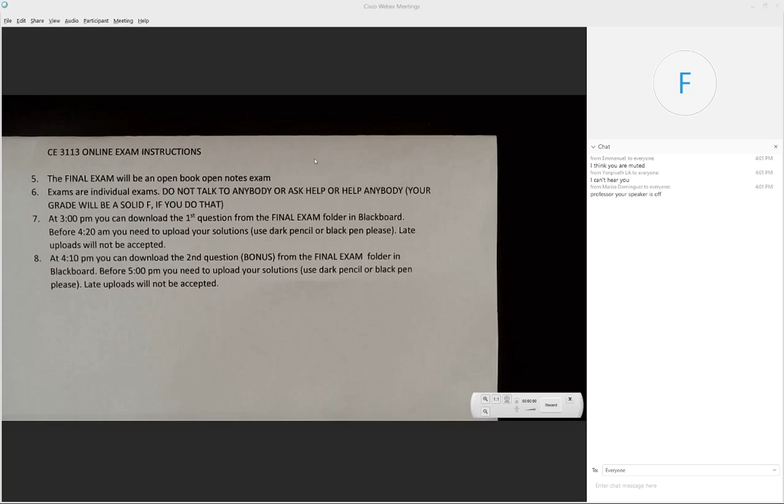I want to repeat what I was saying. The exam is next Monday. Make sure that you are on time.

I'm going to repeat that we had the technology to watch it, so make sure that you do solve the exam by yourself. And I do need to see your work.

At 3 o'clock, you're going to be able to download the exam. I'm going to put the exam on the screen for 10 or 15 minutes, and then I'm going to remove it. You have until 4:20 to finish your exam, and you need to upload it.

For some of you that take pictures, it's going to take forever because the file is going to be huge. You have to do a PDF, a clean PDF, and send it to me. Please don't email the exam to me. Just upload it. There is an overlap at 4:10.

You're going to be able to download the bonus. Officially, the exam is supposed to finish at 4:50, but I'm going to give you 10 minutes, so by 5 you need to upload the second question. Again, do not send it to me, just upload it. Any questions about this?

Dr. Diaz is in charge of scholarships, but he did not send me the whole information, so this is what I got. I'm going to ask Dr. Diaz to resend it to me, and I will put it in a folder called scholarship.

I do know that you have to have letters of recommendation. Sorry, two. One of them must be from a faculty advisor. Make sure that you read what is required, because Dr. Diaz will not accept any application that is late.

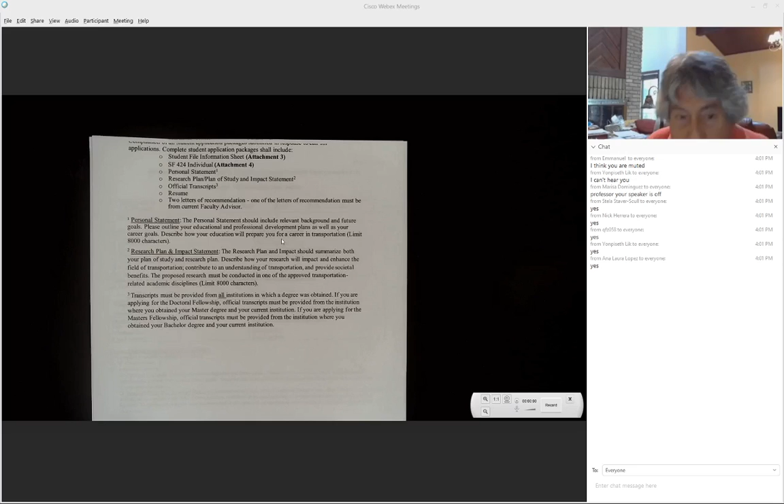But this is a great opportunity, very easy. Not too many people apply. Last year we only had 2 people applying, so everybody that applied got the money. Don't forget, it's called the Eisenhower Scholarship, and I will upload that as soon as I get it from Dr. D.

So if we ask you, it is like two in one. You talking about the letter? Well, we'll talk about that later. You can find me.

A lot of people have questions about the fixed end moment table. In the old time, we only had the left side. So in the old time, the only thing that we had was this side of the table. Now we have both sides of the table.

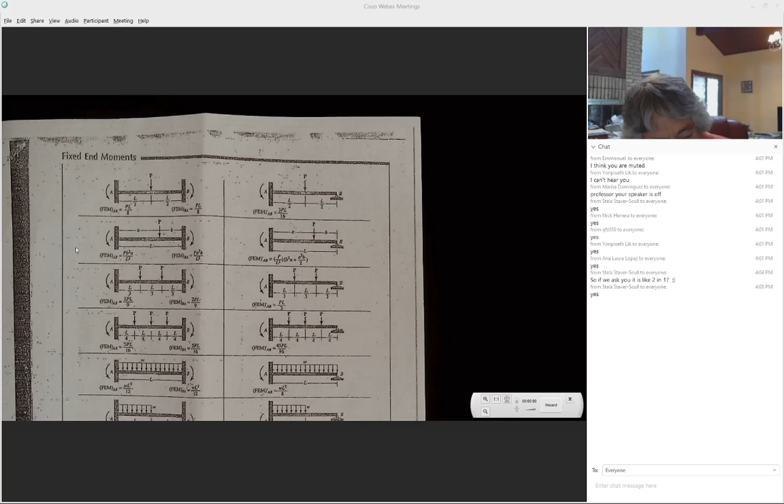Some of the old exams are solved by using this table, and it becomes very confusing whenever we use 4EI and 3EI. The right hand side takes into consideration that sometimes at the end of a member there is a roller or a pin.

That means the moment has to be zero. If there is a pin or a roller, there is no way that you're going to have a moment. If there is a moment, something is wrong.

But I mentioned before that if you use this left-hand side fix and fix, you can obtain this right-hand side with fix to the left and roller to the right, or fix to the right and roller to the left.

All that you have to do to create this fix at the left and roller on the right-hand side is remove this moment. The way we remove the moment, we put an equal and opposite, and we send 50% across, and the two moments now become 3PL over 16.

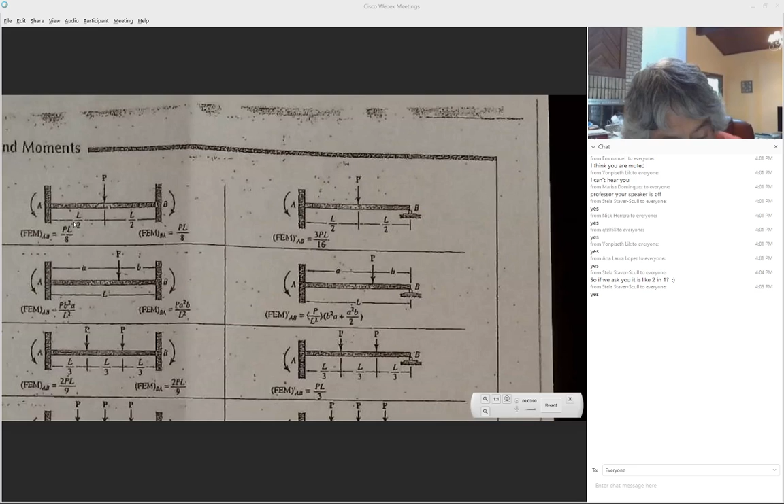If you do the opposite, if you leave this fixed and you put a roller in there, all that you're going to do is put an equal and opposite and send 50% across. Also it's going to be 3PL over 16, but in the other direction.

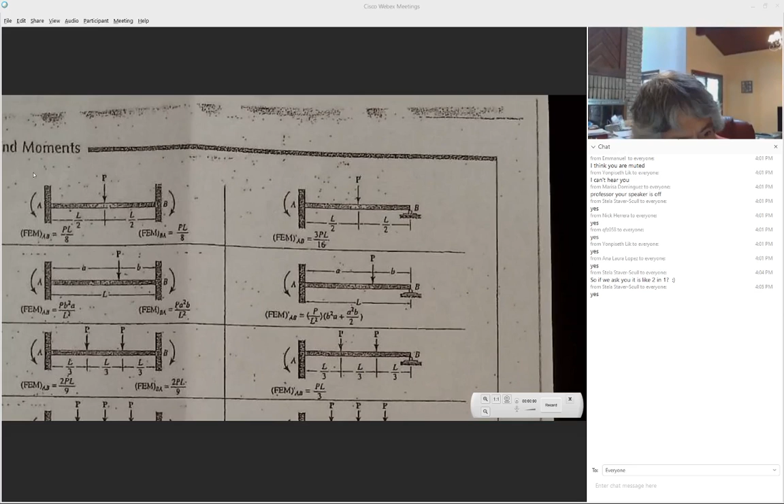So all of these tables on the right-hand side were built by using the left-hand side. Even if you have 3EI over L, you can start with this one, but it's better to use this one so you won't get confused. Some people, nothing wrong, if you have 3EI over L, you can either use this or use this one. But don't forget that in this case, the moment has to be zero.

Another thing, I'm going to go through a whole bunch of examples right now, and the only thing that I want you to know is this.

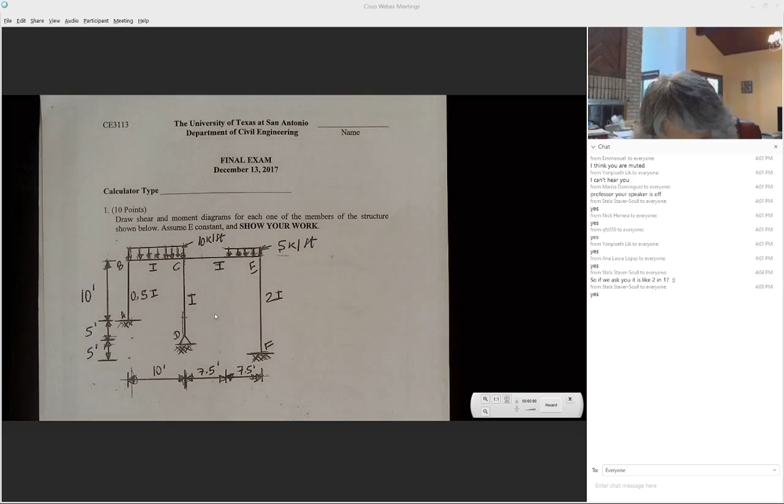So now we have to decide if we're going to use 4EI or 3EI, and it has nothing to do with the loading. It has to do with the ability of the member to resist a moment or to have moment equal to zero.

So now I want to ask you, and I'm going to write it in there. A, B, and forget about 0.5 I, forget about the I. This in here is going to be 4EI or 3EI from A to B. Anybody? 4 or 3? Definitely 4. So I'm going to put a 4 in there, EI.

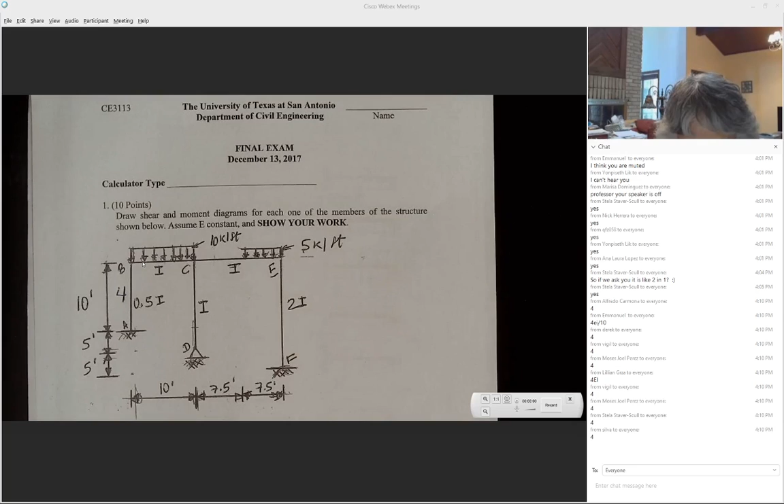4 or 3? Are you sure? Great, 4. This is going to be 4EI. I'm not putting the whole thing. CE, 4 or 3 EI? 4. Great.

So in here, this member, 4 or 3 EI? 3. Great. This member in here, 4 or 3? 4. Wonderful.

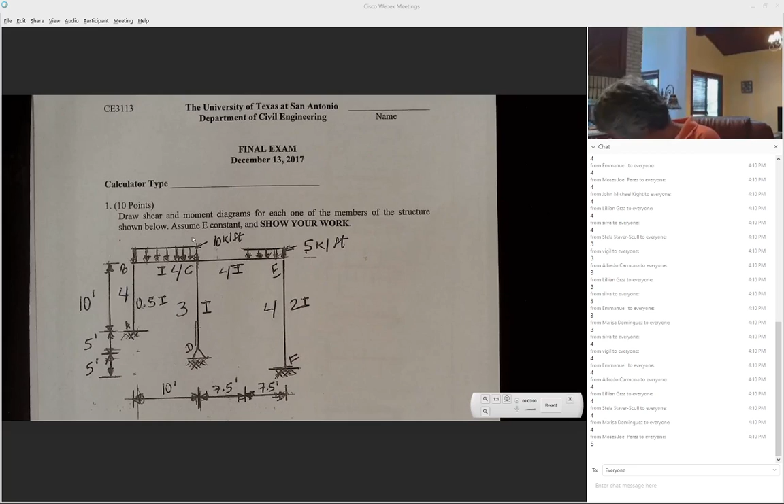So the moment BC is going to be WL squared over 12. The moment CB is going to be WL squared over 12. So we're going to use this: WL squared over 12 and WL squared over 8.

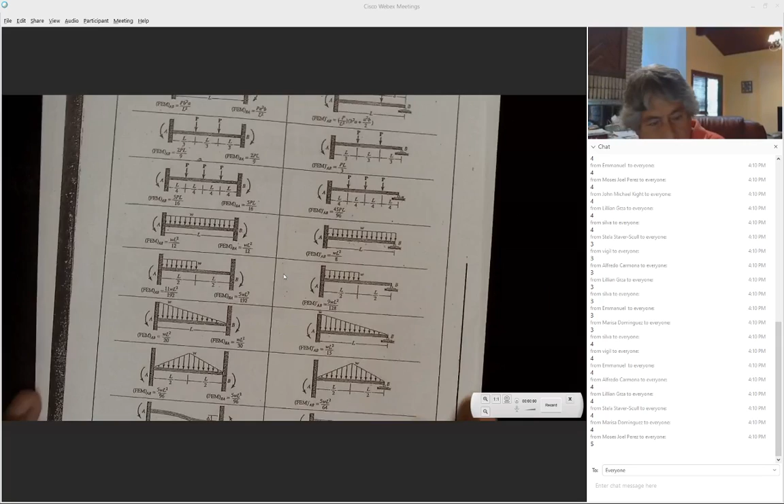This one, you're going to have a fixed moment here, fixed moment. Look, to do this moment in here, they put this as plus 11WL squared over 192. They put a 5, they put a minus 5WL squared over 192, and then they send 50% across and combine this moment with this divided by 2, and gave you this one.

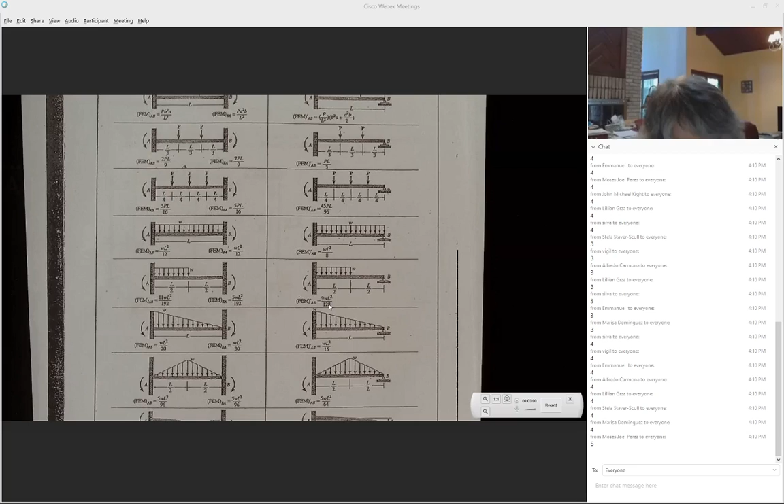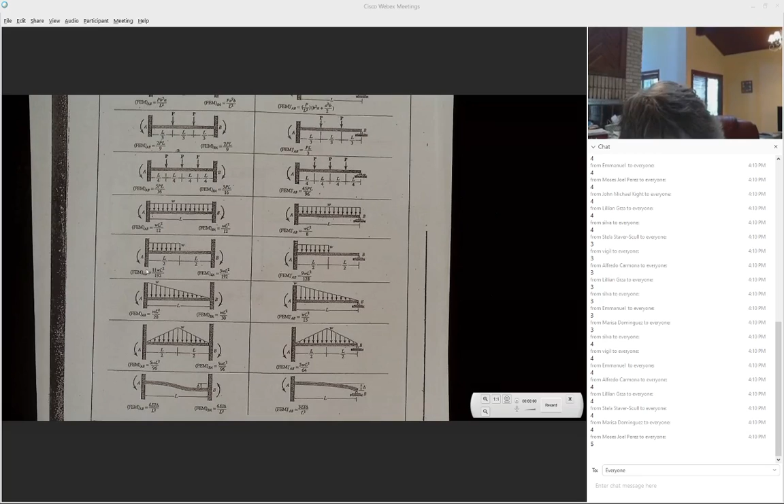This case is not in the table. So the only thing that you need to do, you put this load in here and move this moment here and that moment to there.

This case is not in the table, but we know that the moment in here is going to be clockwise and we're going to be counterclockwise. The only thing that you need to do, you move this load to here. You move this moment to here and that moment to there. Is that clear? Yeah, visual.

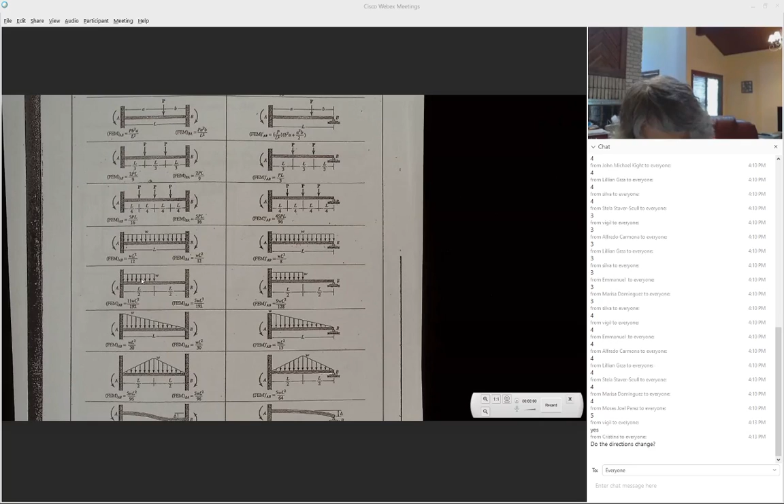So it's sometimes very simple. Now I'm going to go to another one. This is fixed, pin, rigid joint, hinge, rigid joint.

From how do we tell it's plus or minus? Okay, go back to here.

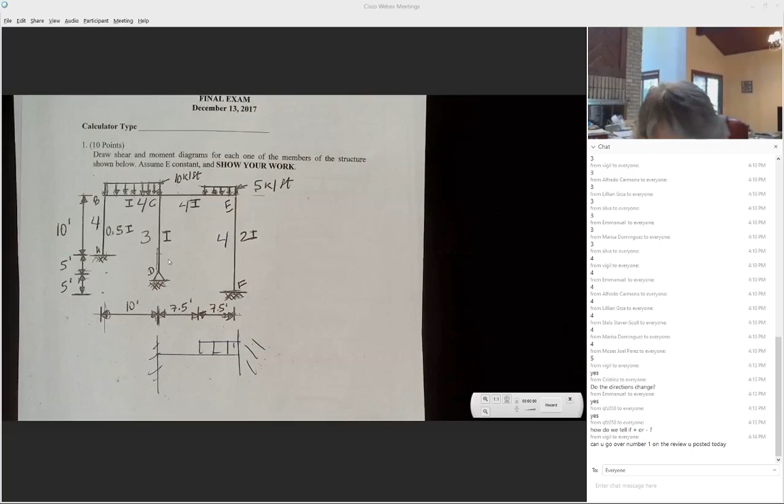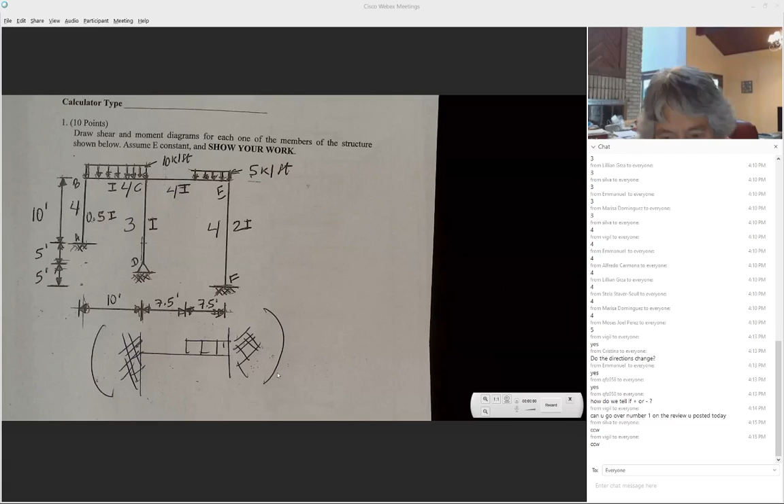Okay, look, gravity load. The one on this, if you look at this, all of these are gravity loads. The ones on the left, they are counterclockwise. The one on the right, clockwise. The one on the right, clockwise or counterclockwise?

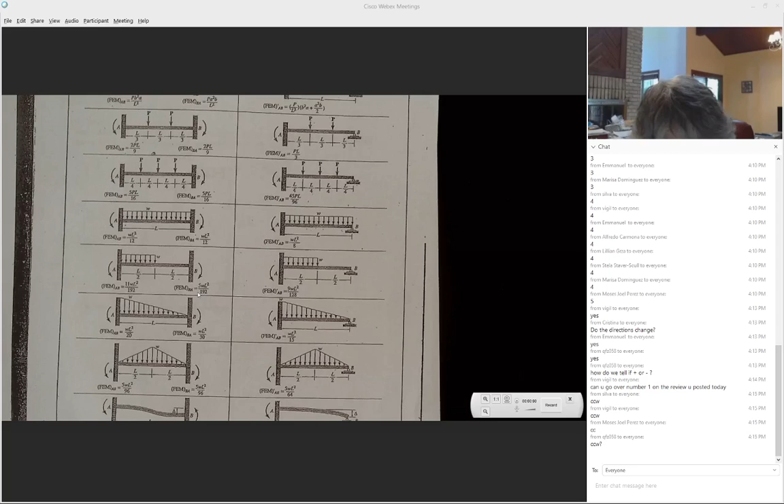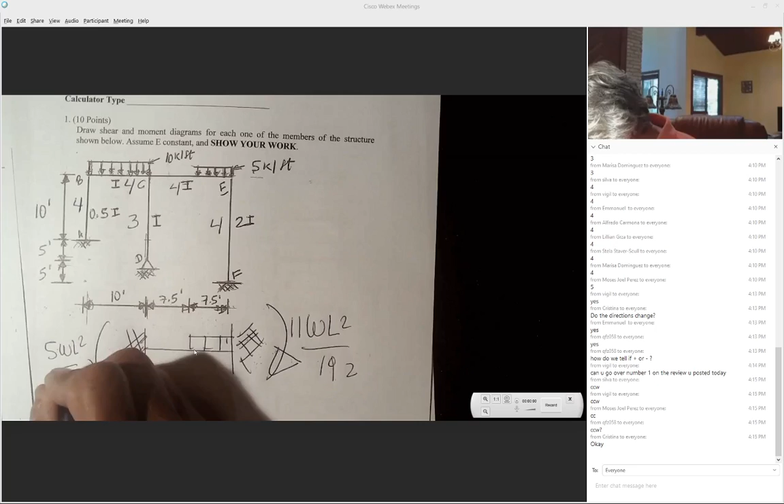The same as this. Look, for gravity load, the ones on the left counterclockwise, the one on the right clockwise. So this is exactly the same. Exactly the same. This value on the right hand side, so look, the one on the left, gravity load, always counterclockwise, this clockwise. This is the value that was on the other side.

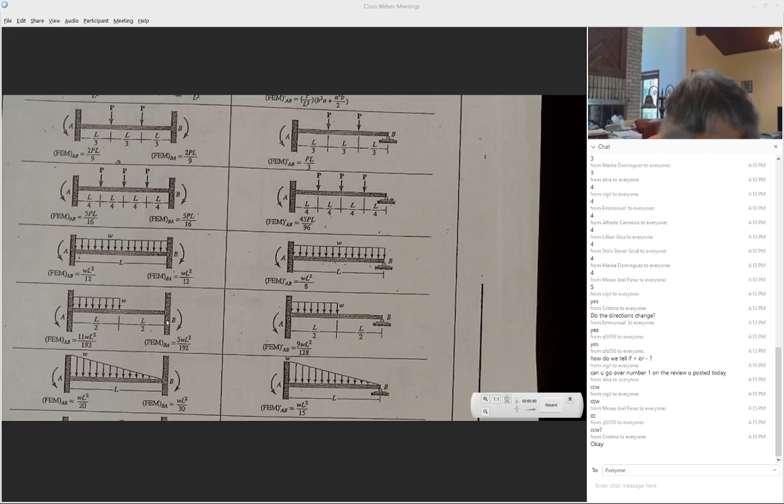I move it to here, I move the other one to here. You can see it here. I put this value here, and here, this value there. The only thing that changed is that it was counterclockwise, now it's clockwise. This is what we have. So, what is the sign of this one? Plus or minus?

Okay, now let me see. There's a question on view: can you explain why EF is 2I? Why? Moses, what are you talking about? Oh, the moment of inertia. Look, thank you for clarifying it.

Look, whenever you have a structure, the columns and the girder, they're going to have different moments of inertia. And like they were helping me, it's given. These values are given for this problem.

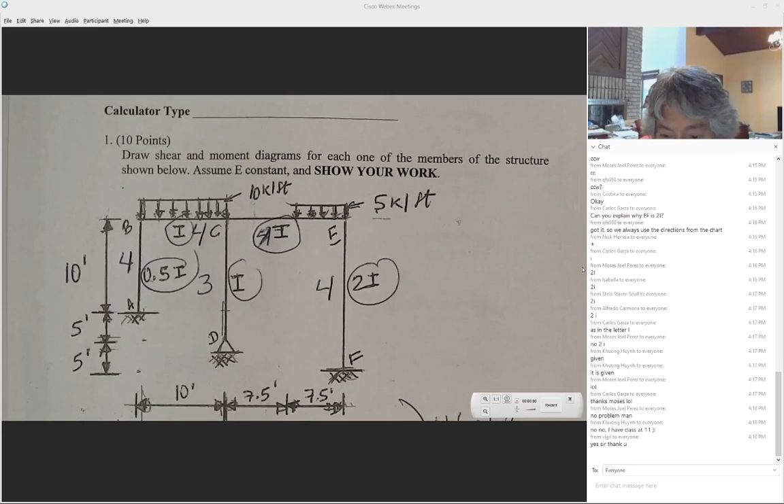Can you wait until tomorrow, or do you want to go over the review problem today? You can wait. Okay, good.

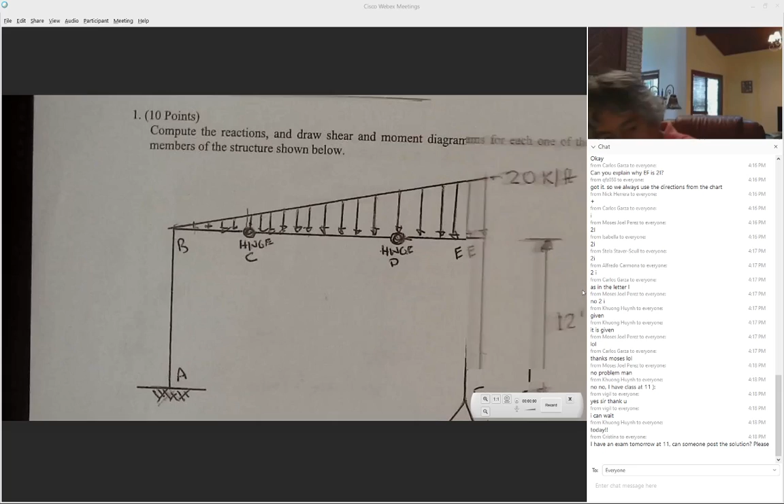So, another problem I was asking you. Now that you're all experts, is this 4EI or 3EI?

I know you're not expert. 4, 3, what else? Okay, I have an exam tomorrow. Oh, okay. Cristina has an exam at 11 tomorrow. How can you have a final there next week? How can you have an exam tomorrow?

I already posted a solution for the review. Oh, highway. Well, I don't know why you shouldn't have highway tomorrow. Is that the final in highway? Oh my God, I don't know. We're not supposed to give the final, but that's not my problem.

Anyway, so go back to this. Is it 4 or 3?

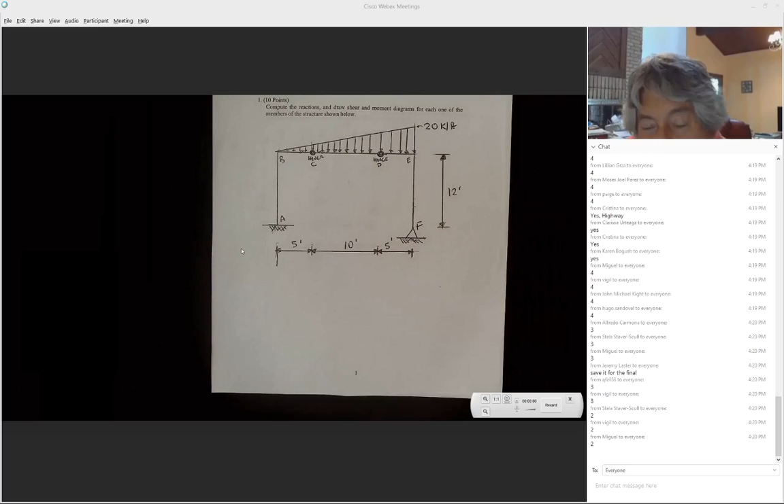Okay, let's stop. I'm going to kill each one of you slowly. Because look, how many unknowns do we have here? How many unknowns? 3. And how many here? Altogether 5. How many equations do we have? We have 3 equations plus hinge and hinge. So is this determinate or indeterminate? Determinate, determinate. So we cannot use 4EI, 3EI.

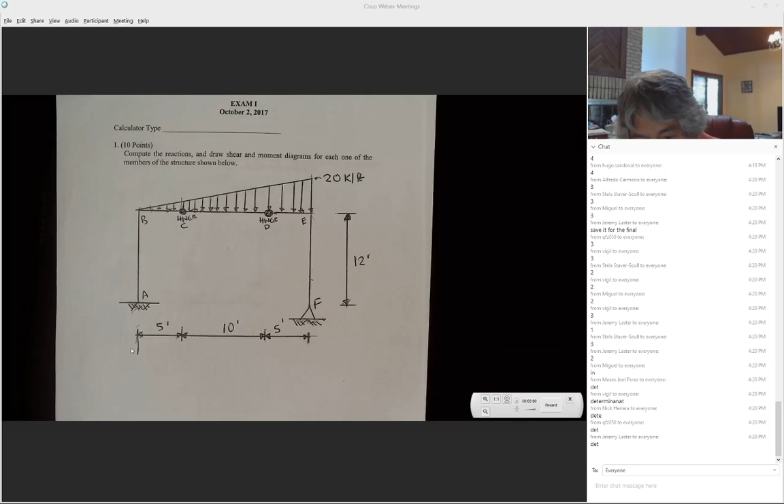You need to pay attention, because in the past I'm given a structure that is determinate, and people try to solve it as indeterminate. But I promise I will not give you that trick today, because everything has changed, everything is online. So there's certain things that we used to have more time to look at before. We don't have the time now. This has been a crazy semester.

I just want you to remember: always count the possible components of the reaction. I knew that people were going to say 4, 3, nobody's going to give me the answer. So look, you need to wake up and count always all the possible components of the reaction and how many unknowns we have.

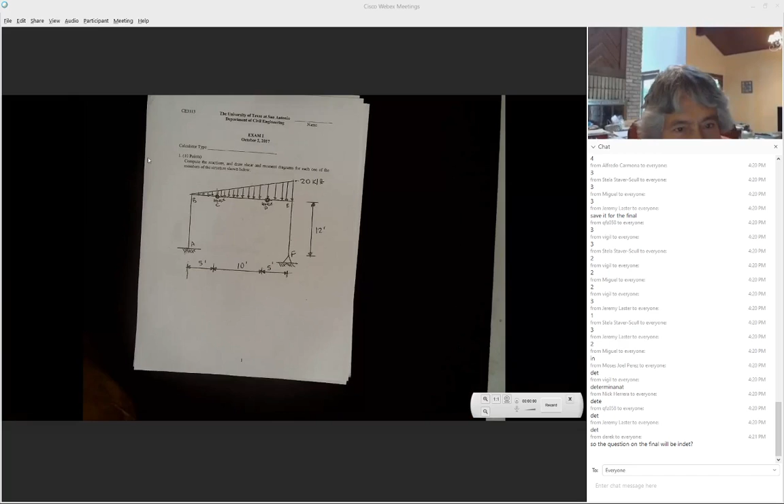Derek. Okay, let me see. Yes. Okay. So we have 47 of you. Yeah, just turn on your microphone. So we have 47 of you in here. Do you really? Hey, turn that mic off.

So we have 47 of you in here. The last portion of the semester were indeterminate structures, so it had to be indeterminate. I had to make sure that you understood indeterminate structure. But what I'm saying to you, always, always, always find out how many unknowns we have.

Watch. Yeah, Hollywood, it's so good. That's literally what I was about to say. Can't believe it, it's amazing. Tito is the one that is doing it in Hollywood. So on Monday, Tito is going to be in Hollywood during the exam. I'm glad that he had a job.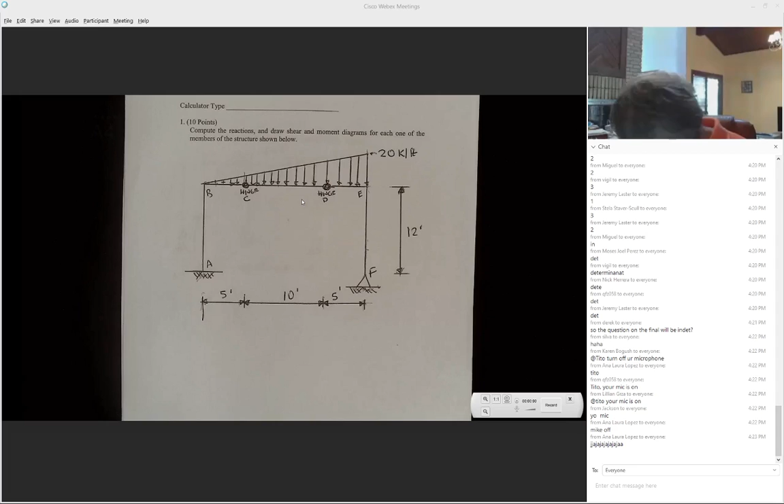Okay, so I was saying, don't forget to count all the possible components of the reaction and how many equations we have. It was just to see if you're paying attention. Go back to another problem.

Tell me, determinate or indeterminate? Indeterminate. Good, because we had 3 and 3, 6, 7, 8. 8 minus 3, fifth degree. One of the confusing things here is that this is a roller, but it is an interior support. This is a roller interior support, so this is a continuous beam, a continuous member.

So over the support, there's going to be most of the time a negative moment. Over the support, a negative moment. So the moment at B is not zero. There is a moment at B, there is a moment at C. This is a continuous member. So there is a moment at B, equal and opposite BA and BC. There is a moment at C, equal and opposite CB and CD.

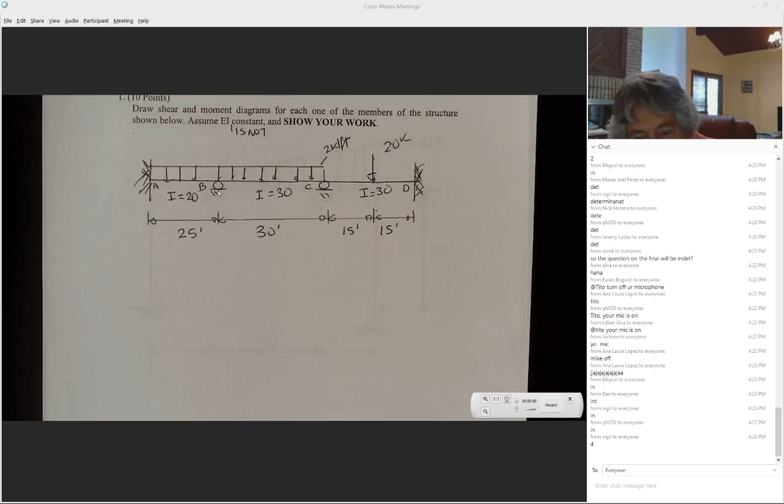So I in here is 20, I is 30, and I is 30. Right? So different moment of inertia. From A to B, is it 4EI or 3EI? 4. I'm going to write the whole thing, I don't want it to get confused. So it's going to be 4E times 20 over 25. 4EI over L. We do not have to worry about the units, you just put it the way it is given.

Indeterminate, right? Okay, but if I had a pin, the moment is going to be 0. So this member will be 3EI over L. If the moment is zero, this will be 3EI over L. We modify the stiffness to solve the problem quicker and faster. So, no, I'm glad you asked. I'm glad you asked, so this will be 3EI over... Ask please, because people are confused, believe me. From B to C, 4 or 3.

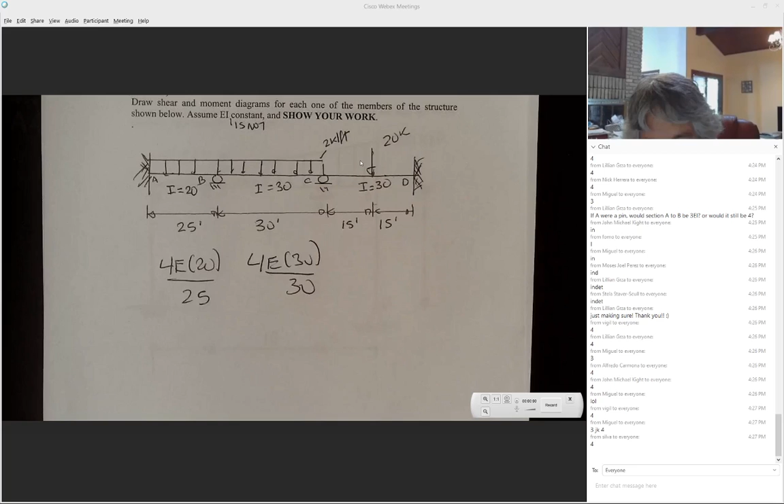4E30 over 30. Now you cannot go wrong with this one. CD, 4 or 3? So, no more? 3 or 4? 4. So this is going to be 4E times 30 over 30.

AB, the moment is going to be WL square over 12 and WL square over 12. So there's moments at rollers B and C because the beam is continuous. Christina, that's a good question.

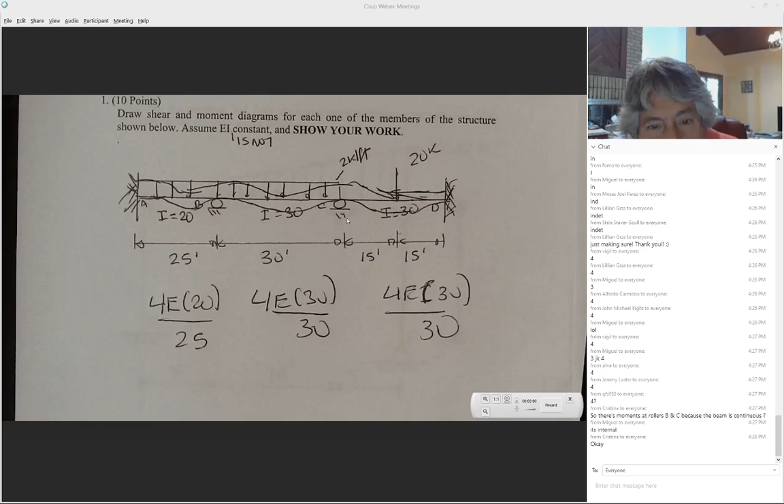So this is more or less the way this is going to deform. You can see that this is a continuous member that is bent. The only thing that the roller is doing is putting a point to support this continuous beam, and so it's producing a change in the way this deflects, the curvature changes from the compression being on the top, to compression being at the bottom. But the reason is that this is an interior member, it's just bending, helping this beam to change the curvature, the same in here. That's why we have a moment in there. Thank you for this question.

And so I was saying that WL square over 12, negative, WL square over 12, positive. W square over 12 negative, W square over 12. This load is exactly in the middle. This is going to be kind of clockwise, it's going to be clockwise.

From the table, anybody, what is the moment in here? From the table, P. PL over 8, good. And PL over 8. So this is a very simple computation. I'm going to go to the next one. And remember, distribution factor, there are 2 at B, there are 2 here, and 0 and 0. Another problem.

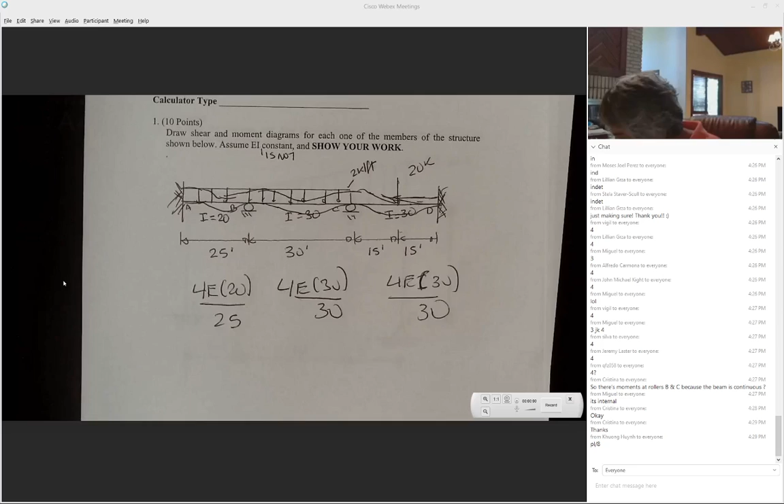We use 3PL over 16. Okay. Sometimes I don't see the question on time, but the question for this problem, that is fixed here and has the ability to resist the moment in here. The question is, can we use 3PL over 16? So whenever you look at this...

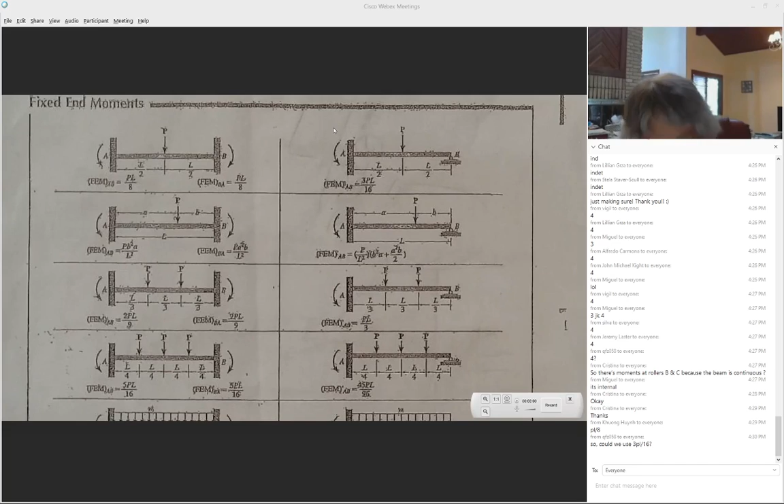This is QFZ058, I don't know who the person is, but I'm going to go to Mr. QFZ058, or from anybody that wants to help. When do I use 3PL over 16? When do I use it, Eric? When do I use 3PL over 16? What is the condition that I have to use 3PL over 16? Look at this.

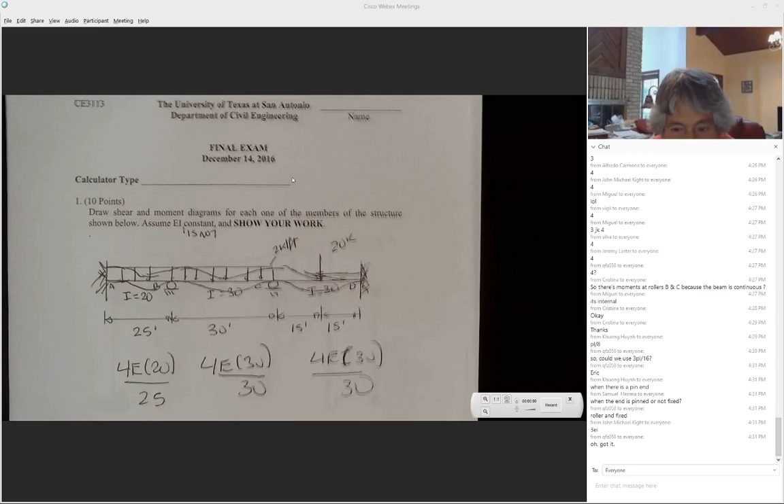When the end is pinned, exactly. Exactly, you got it right. Okay, you got it. So I'm gonna, okay. Please feel free. So, you will. Okay.

Every single problem I have to show you work. We don't believe in magic. We need to see how you guys work. First question: determinate or indeterminate? Count all the possible components of the reaction.

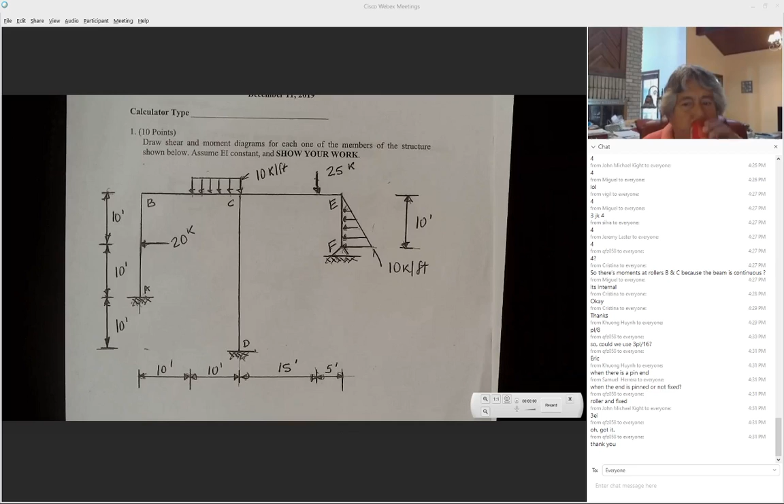Indeterminate, good. There's something important that we need to decide here, and the decision that we need to make: is there any way that this frame will move to the right or to the left? In other words, lateral movement or side sway? Okay, good, there is a lateral movement in here.

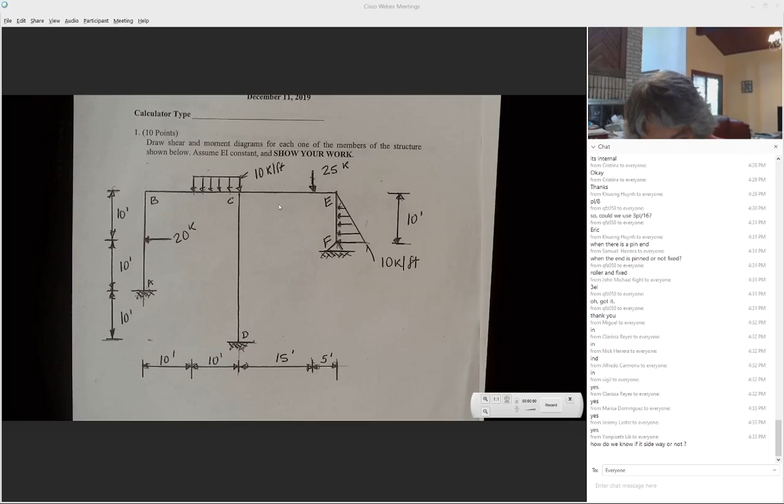So that means we have to do two moment distributions, but distribution factors are the same, fixed end moments are the same. So now we're going to decide it, and here EI is constant. How do we know if it's symmetric? There's no symmetry with the geometry, right? To have symmetry with the geometry, this has to be 20, and this column has to be 20. So there's no symmetry with the geometry.

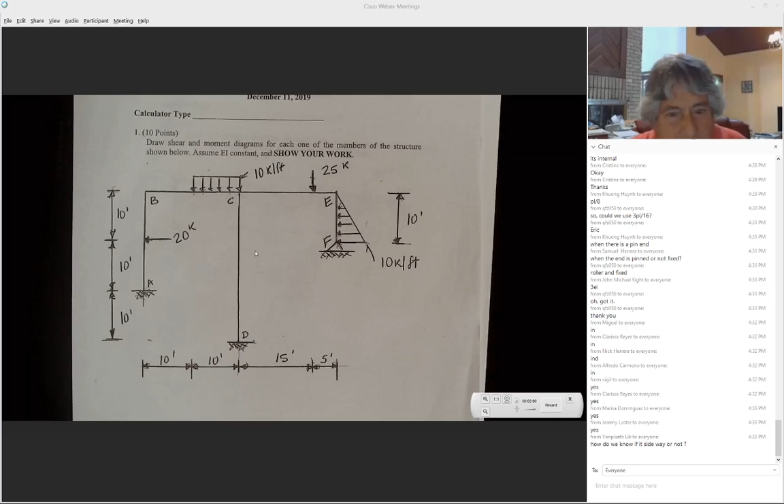There's no symmetry with the loading. These are elastic structures that are going to deform. Then we have this pushing, this wind blowing the structure, and this point load also trying to move this structure. So this joint is going to move to here, this joint is going to move to here, and this joint is going to move to there. So we have a lateral movement because the joints are free to move, free to move, free to move.

That is the reason why we had a lateral movement. If I had a wall here or a wall here, it will not move. In here, there's no way — if you push this structure, it's gonna move either to the left or to the right. So that is why we have a lateral move. And how do we know? Okay, Yonpisith Lik? You understand that? Okay, so remember, lateral move.

Now we have to look at column AB. Fixed, and this is a rigid joint, moment and moment in here. This member BC, this is a rigid joint, it had 3 moments in here. This is a rigid joint, 2 moments. This is a pin, no moment. There is a fixed support, there is a moment.

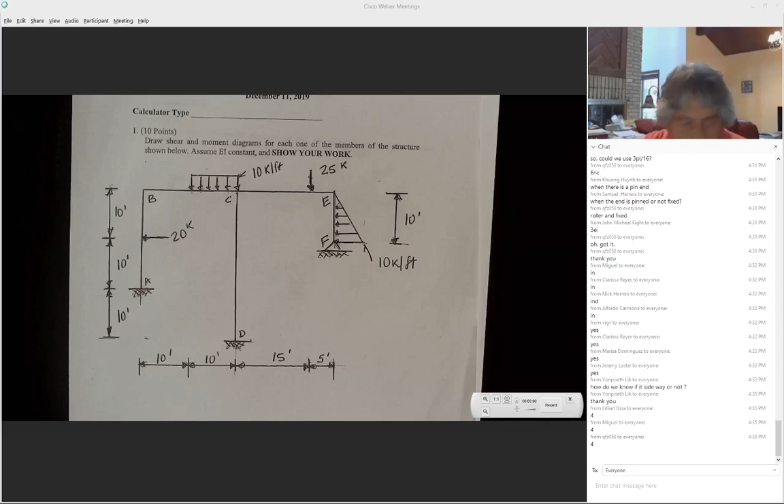So member AB, 4 or 3, EI over L? 4, good, I'm gonna put 4 EI over 20. Member BC, 4 or 3? 4, 4 EI over 20.

Now, one question. This is 4EI over 20, and this is 4EI over 20. When I compute the distribution factor from B to A, it's going to be this number divided by the summation of this number plus that number. When I compute distribution factor from B to C, it's going to be this number divided by this number plus that number.

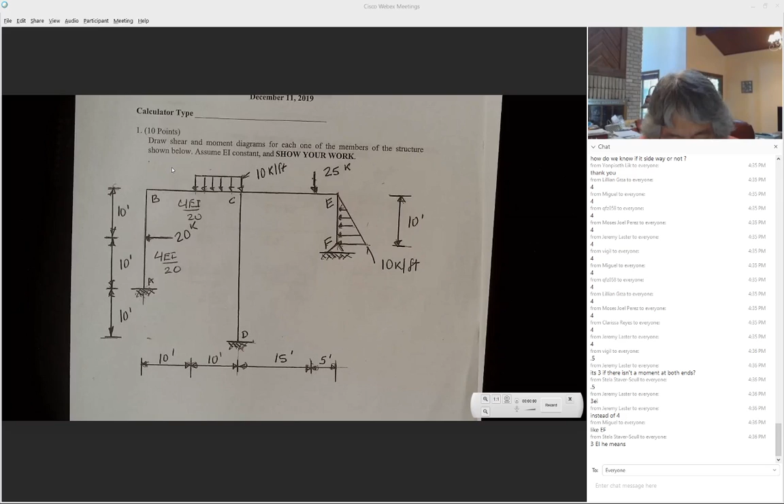So distribution factor BA 0.5, distribution factor BC 0.5. Okay, now Jeremy had a question: if there isn't a moment at both ends, if there isn't a moment, instead of 4, if 3 EI. Yeah, no, I know 3EI, but look, not necessarily.

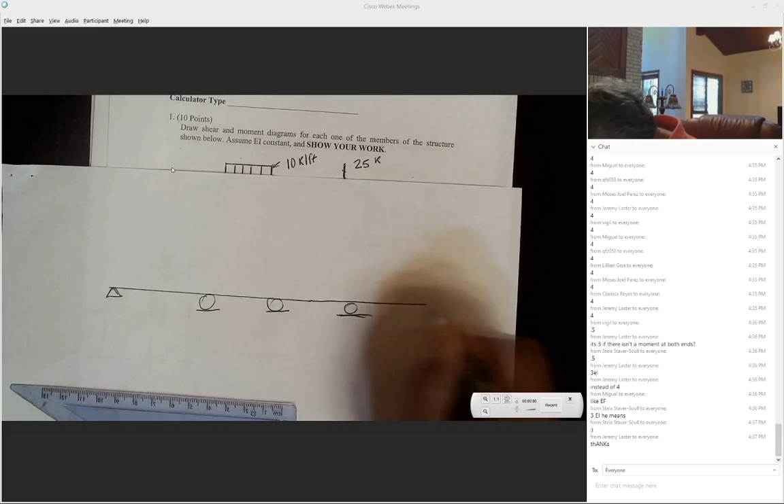Look, there's no moment at this end, so this is 3EI over there. Because this is continuous support, there's moment in here, this is going to be 4EI. The same happened in here. We had moment, 4EI. And moment, no moment, this is 3EI over there. So that's when we use the 3EI.

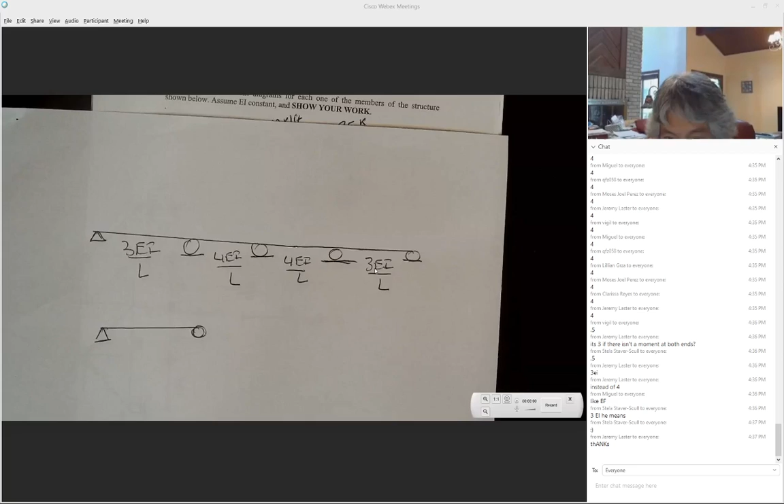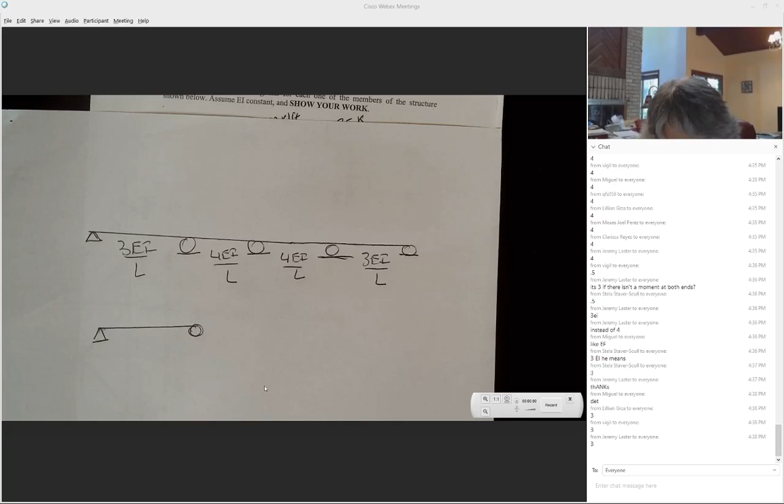But what about you say no moment in here and no moment in there, right? If I understand correctly, isn't a moment at both ends? Like for instance, if I had this and this, 3 or 4, nothing. This is the terminal. There's nothing here. This is, well, not 3, but you have to be careful, right?

No. Just trying to make sure no entrapment, and make sure that I'm answering your question. You asking me the question. I didn't give you the question. That question came from Jeremy.

So go back to this problem. But please ask questions because some of you never ask questions. I don't want you to get confused. We already have 4EI, and also I use this to tell you about the distribution factor 0.5.

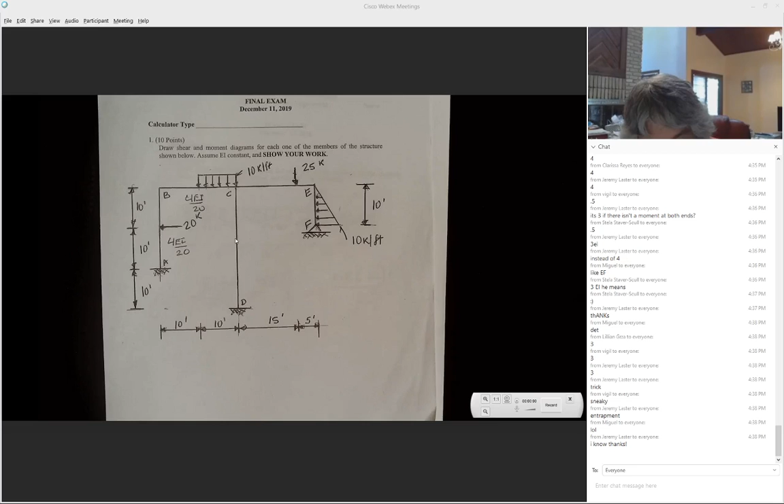Now we're going to look at CD, 4 or 3? 4. So it's going to be 4EI over 30. But you do need to pay attention because when I give these problems, some people do 4EI with 20, when this is 30. What about CE? 4 or 3? 4. Over 20. And EF, 3.

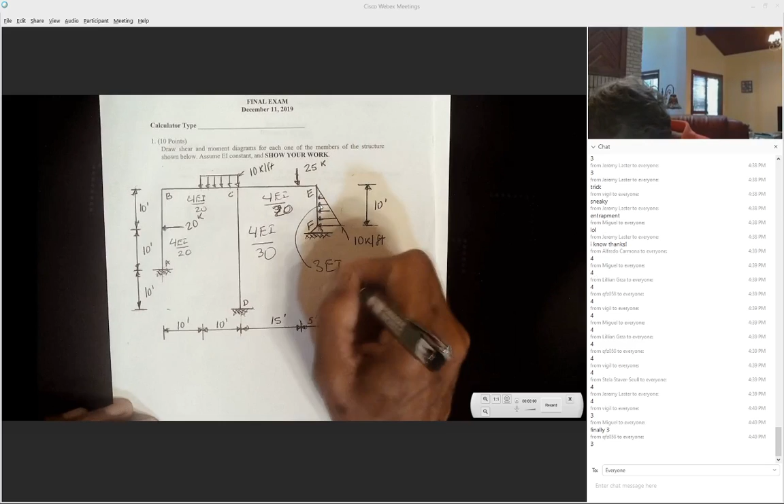Another, I remember because there was a 2019, I remember mistaking here. Look, this is 15 and this is 5. 15 and 5.

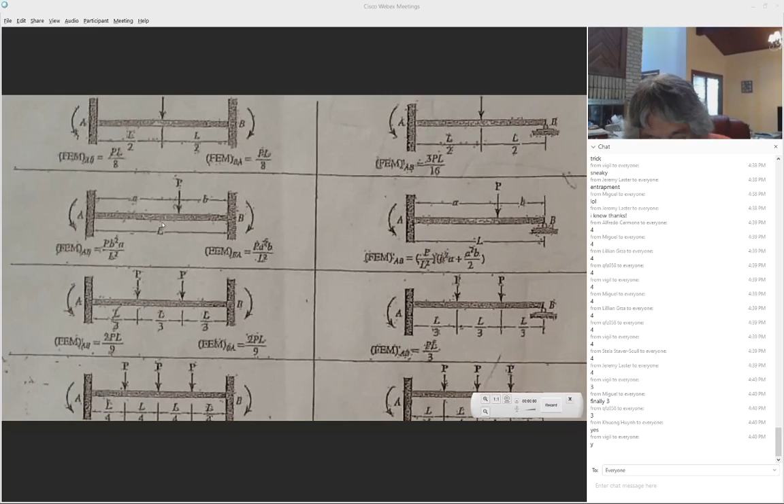Can I use this formula here to find the fixed-end moment? Definitely, right? So this depends on the A and the B.

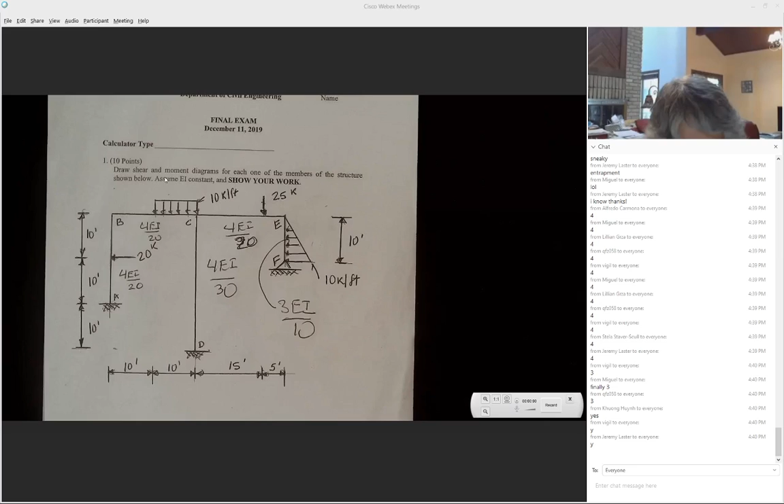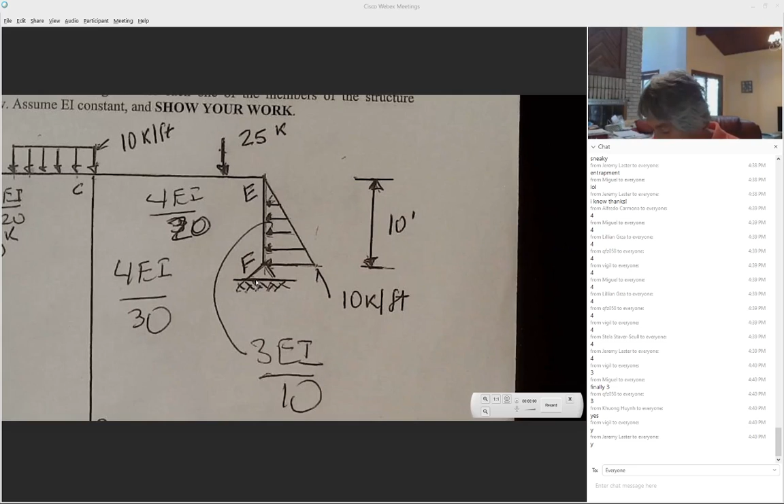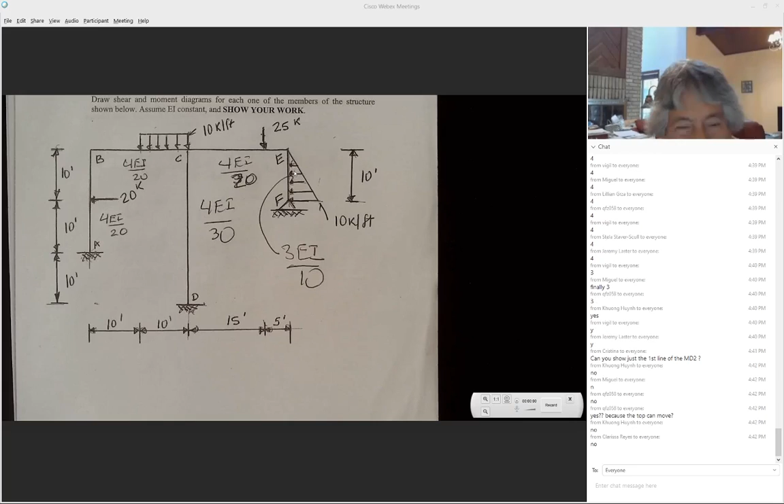Can I put this WL squared over 15, my fixed end moment, to do my moment distribution? Can I put in here the value WL squared over 15? Yes or no? No, no, we cannot do it. So what do we do? Look.

Pay attention, I know, Miguel. Pay attention to this. Exactly the same loading, but I had put fix and fix. There's a wall and there's a wall. Gravity load, this moment is gonna go in this direction, that moment is gonna go in that direction. Okay? So now I want you to look at this.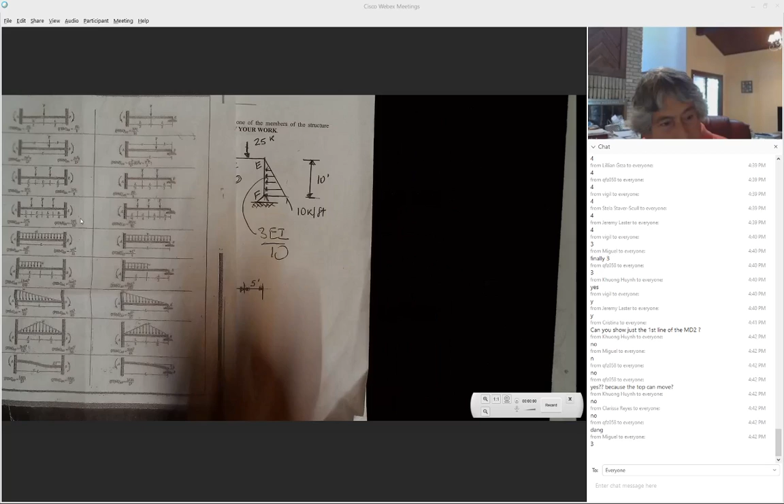Hopefully you have your book. I want you to look at this. Okay? Look, on this side, WL squared over 20. On this side, WL squared over 30. On this, where the load is, WL squared over 20, WL squared over 30.

What do I put in here? WL squared over? And in here, WL squared over 30. Good.

So I do not have fixed like this. I have pin fixed. I need to get rid of this moment. I need to get rid of this moment. I have to make it 0.

Is it positive or negative? Positive or negative? Look, another way of asking you, clockwise, what kind of clockwise? Positive, positive, positive. Clockwise is positive. So to kill it, I need to put a minus WL squared over 20.

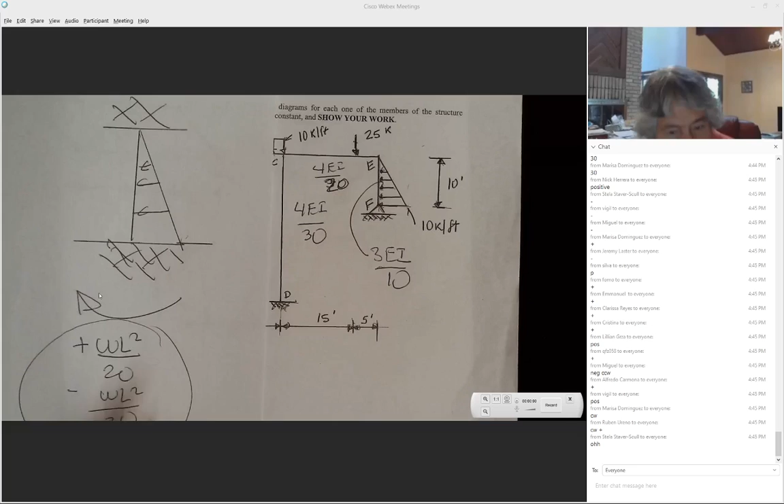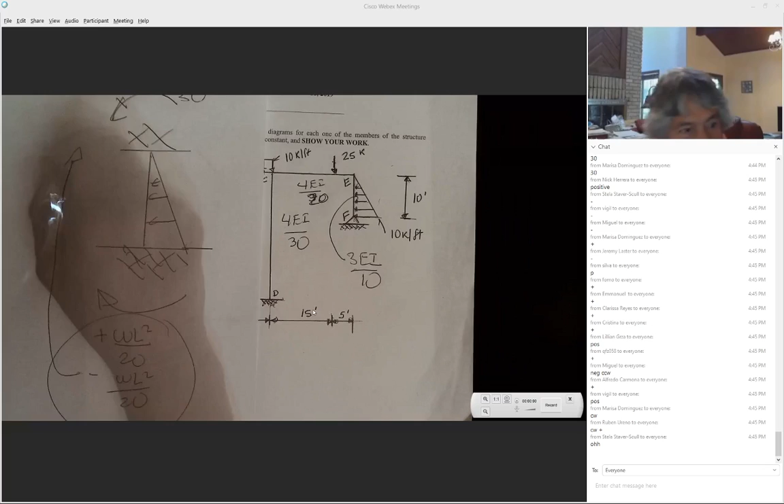Let me change it a bit. So to kill this moment, to put a negative, I have 0. I need to send 50% of this to the top. And that is WL squared over 40.

I kill this one with an equal and opposite. I need to send 50% because the carryover factor is 1/2. So now, look, this is negative. This is also negative. I need to add those two. I need to add those two. It's going to give me the fixed end moment in here.

So I kill this one equal and opposite, carry over, take 50% across. Those two are the same sign. I need to add them. And that is going to be my fixed end moment in here.

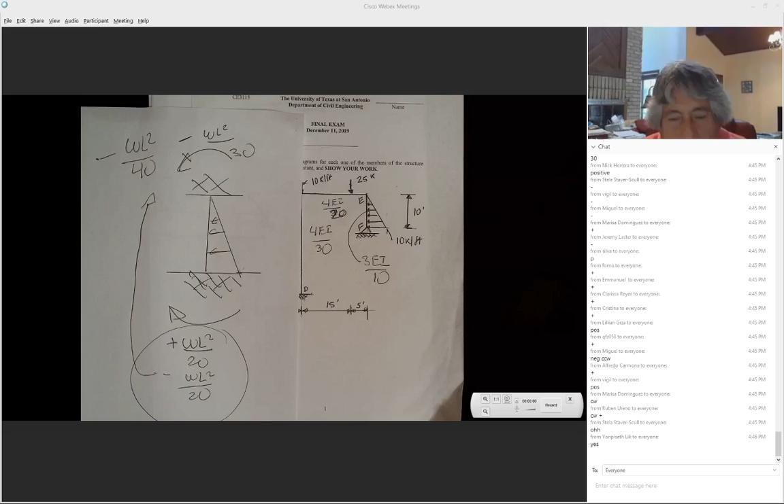Any question? You want me to repeat it? Not that bad still. You want me to repeat it? Okay, look. This case in here is not in the table. It's not in the table because, look, 10 is at the pin and 0 is where the moment is.

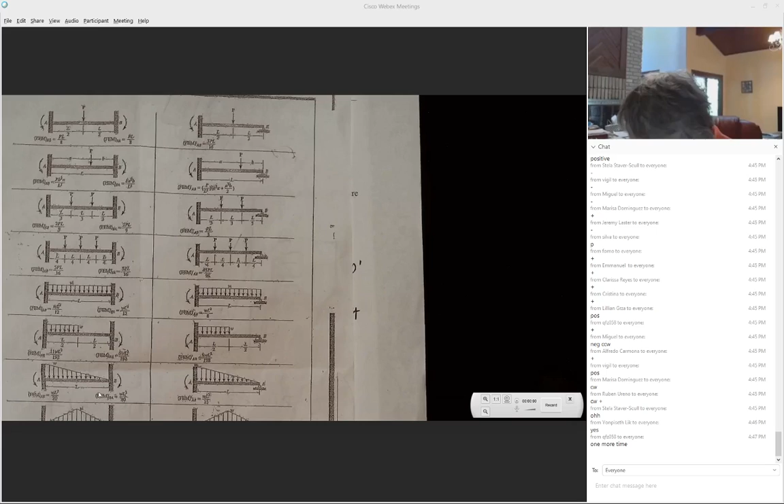The case that I have here is reversed, because mine has 0 here, reversed from this one with the maximum. So I start from this one and just reverse it. I put 0 and the maximum. If I reverse, I have to reverse the moment. And this is what I did here.

I started the same way I have here, but fixed. I put the moments and everybody told me W squared over 20 comes here, W square over 30 comes to here. I need to get rid of this moment because I have a pin here, so I put an equal and opposite: positive W square over 20, negative, I have 0 like here. So I don't have a fix, I had a pin because it's 0. But since I put this moment on this side, the carryover factor takes 50% across, and it's W squared over 40, negative, and I already had a negative W squared over 30. I add those two, and that is going to be my fixed moment. That's what I did.

Can we add this to the table? Listen, this exam is open notes, open book. You can add anything you want to the table. That would be a good idea. Do whatever you can that is legal, and this is legal. Any other questions?

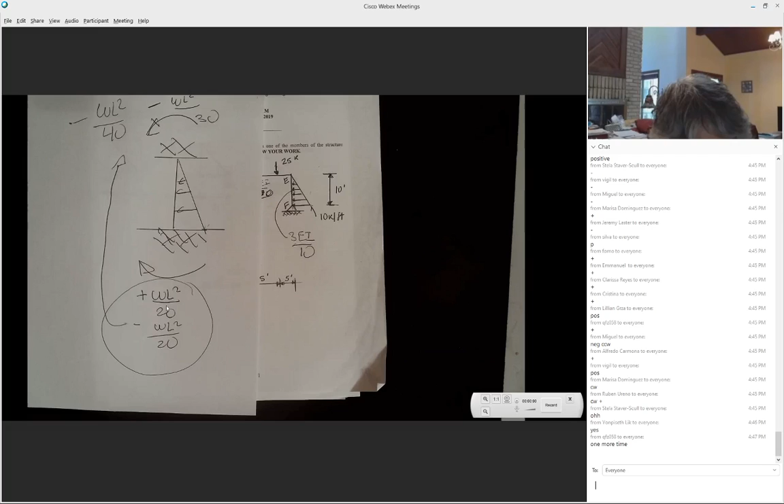Before I forget, the exam tomorrow at 11 o'clock, is it a 1 hour or 2 hour exam? Anybody in that 1 hour or 2 hour exam? 10 to 11:30. And how many people are in that class? Just say, how many? 2, 3, whole bunch. Okay, listen, because really I don't want to hurt you, I want to help you. I'm going to move the review. If I move the review to noon, to 12... oh, you don't worry, there's only one class until 11. So if I move it to noon until 12, am I going to hurt anybody? No.

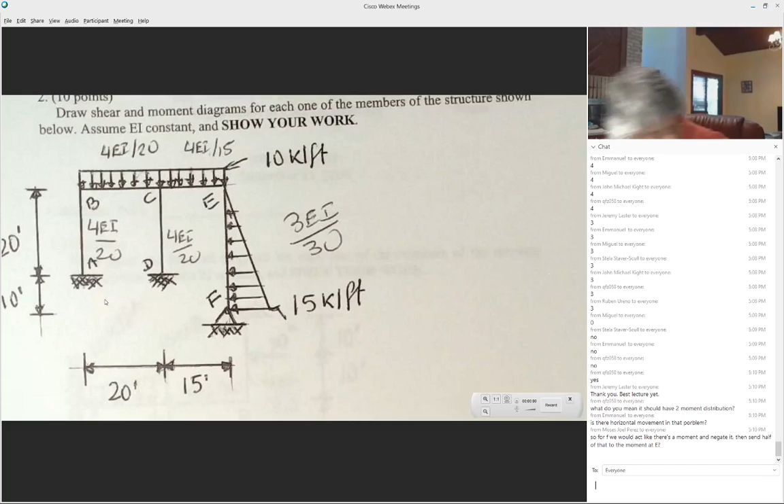At the bottom of this table, there is a case that whenever there is a support movement, if both of the supports move at the same time, no moment, but if one stays and one moves, it creates 6EI delta over L squared. Both of them same magnitude, opposite to the movement.

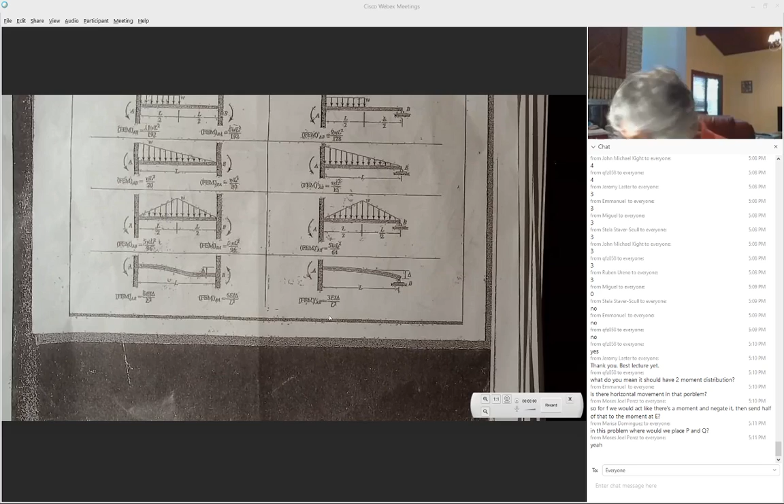Whenever we had only a fixed support and roller, it's 50%, 3EI delta. So we're gonna come here and we're gonna assume the moment.

Since the moment is here, 6EI delta over L squared. Movement goes in that direction. The moment goes in the opposite. Six EI delta over L squared, both of them 6EI delta.

So all of them in here, they're 100. Assume. Those are the moments assumed for my moment distribution number 2.

However, this one in here is 3EI delta over L squared. This moment in here is 3EI delta over L squared, that is 30 squared. The only thing that they have in common is the delta. So this one in here is 6EI delta over 20 squared equal to 100.

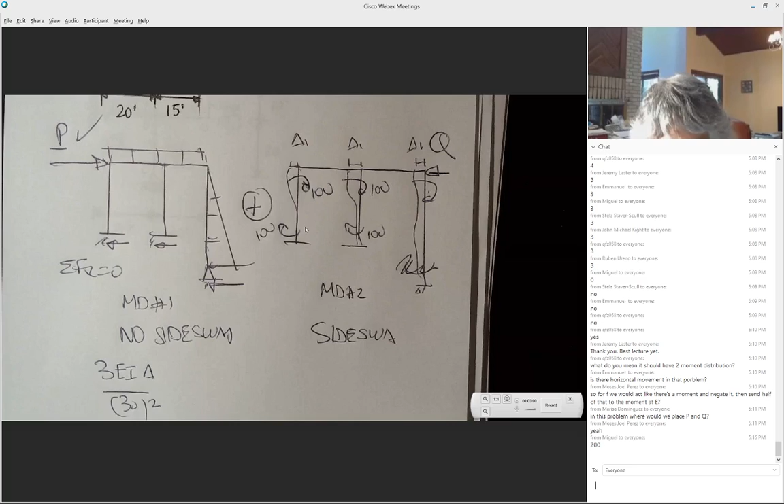So this moment, 6EI delta over 20 squared equal to 100, delta is equal to 100 times 20 squared over 6EI. This delta, I'm going to put it in here. So this is going to be 3EI over 30 squared times delta, 100 times 20 squared over 6EI.

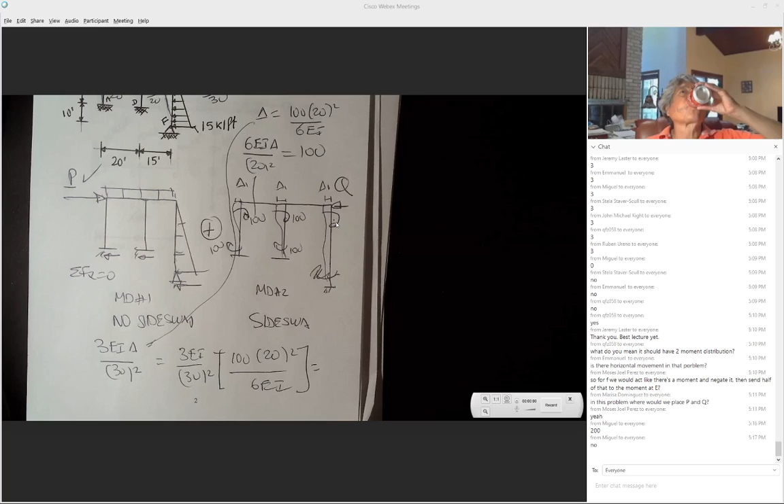And whatever number is in here, I put it in here. Is that 200? So what is the value? Do the computation real quick. Anybody? Everybody left already? Twenty-two. That's correct.

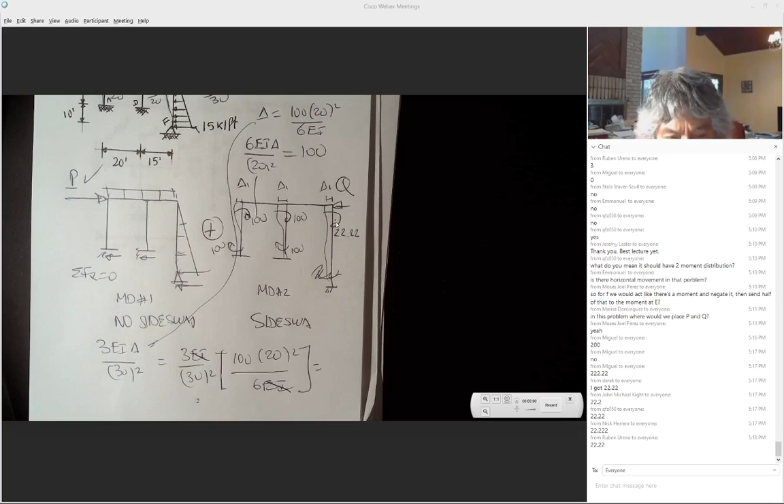With this moment, we do our second moment distribution. These are my fixed moments for moment distribution number 2. I'm going to find the shear forces and do summation of forces in X and solve for Q.

Any other question? P and Q, I already put it. P and Q. So we have like there's a moment negative at E. What do you mean it should have two moments? Is there horizontal movement in the problem? Definitely. So for F, we would have like there is a moment, half of that moment at E.

What are you talking about? I don't know, for F. Oh, F, we don't have a moment. You're talking about we're going to create a formula like we did before. So no moment in here. We're going to create our table by using the case that Fomo wanted to put in the table.

Any other question? Are we going to have this type of problem in the final, from 0 to 31? Look, I don't know what I'll put in the final. What I want is for you to understand everything, as much as you can. Any other question?